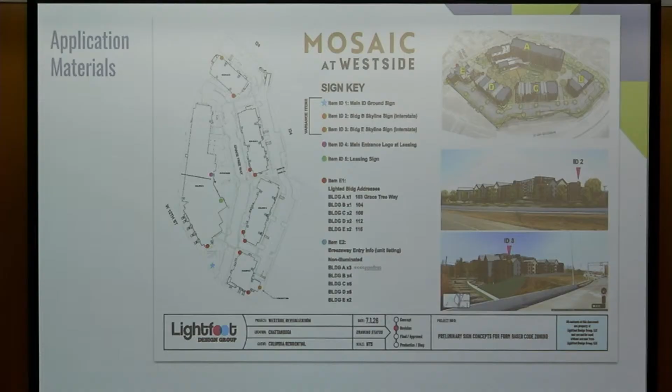This is the monument sign and aerial map of the location. This is the new branding, west side, fully built. Again, this is a list of their modification requests. This is an updated signage key. This is the new branded sign, Mosaic West Side.

And the location didn't change where you're proposing the sign? No, ma'am. Okay, so this is showing the sign with the 5-foot setback. And this is a rendering of the proposed skyline signs on building B, which would face the highway. And then this is a 12th Street perspective, and the larger perspective.

So again, they're requesting those modifications to allow for the monument sign, to reduce the setback, increase the height, and also allow for skyline signs on buildings of 4 or fewer stories. This is in our west side context area, one of the oldest neighborhoods with rich and complex history, now home to both private and public housing. The intent of this zone is to accommodate a mix of medium and high intensity multifamily housing options, mixed with neighborhood commercial uses in a pedestrian environment that remains respectful of the neighborhood's rich history.

So I would love to invite the applicant. Okay, and if you want to go back to this. Can I swear everybody in first? Oh, did I miss that? Yes, I apologize, I just don't want to do it for every single person. Yeah, got it. If you're speaking today, will you please stand to be sworn in?

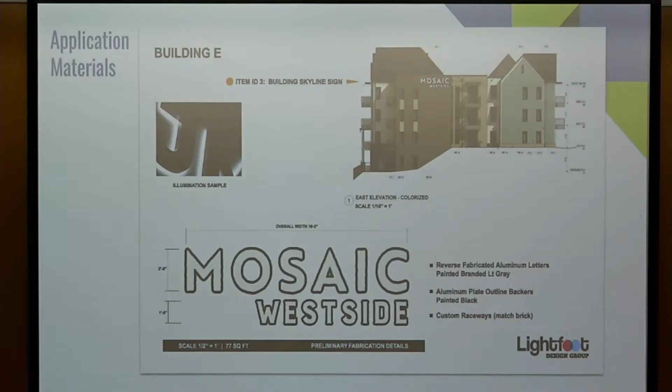My name is Dina Harvison, I'm with Lightfoot Design Group, and I represent Columbia Residential. One of the owners of Columbia Residential is here with me today and wants to contribute to the conversation. When we were here in February, we presented our modification requests, and one of the setbacks was that the final branding and name of the community had yet to be chosen. So we elected to come back once that was completed, which it has been, and was part of the presentation today.

We were also asked to provide a PowerPoint of some pedestals in an urban setting, like what we're asking for. Is the PowerPoint presentation part of the slides? No, I did not get that—but you emailed it to me? Yeah, it was emailed, I emailed it to you. And I think I uploaded it as well, both. It's a PowerPoint presentation. You had wanted to see what some pedestals look like in that urban setting, and that's what the PowerPoint presentation is.

To introduce you guys, I don't know if you're all familiar with the West Side Revitalization Project, but it is primarily diversifying the housing of that area. It represents the east corridor, split by the interstate. The skyline signs we're asking to modify—we feel that's an integral part of the community, mainly because of the interstate visibility.

No, I think it was the PowerPoint I emailed. There's a PowerPoint, Columbia sign. Oh, there it is, yeah, that's okay. Yeah, okay. These are examples from other projects that just show the pedestals.

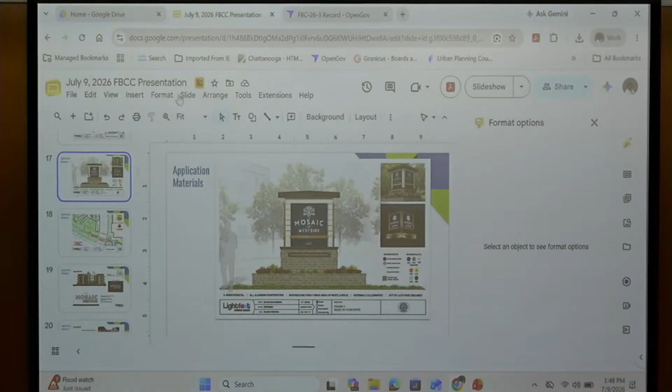And then the final modification request is to install skyline signs on the buildings that front Interstate 24. That's the last 2 pages.

And those would be fabricated aluminum letters that halo illuminate from the back side. So they're very classy. It's more fitting with a residential, higher end look than a commercial site.

That shows you the entrance with the slope and the heights of the buildings, which is why we're asking for the increased height of the sign.

And I also have the owner, Jim Grauley. He is partnering with Chattanooga Housing Authority, and he would like to say a few words too, please.

Thank you, Dina. Thank you for the opportunity to speak to you. I just want to give you a perspective from what we're doing here and also answer any questions you have.

The West Side Development, we were recruited as the master developer in partnership with the Chattanooga Housing Authority. It's really an initiative of the City of Chattanooga, the Housing Authority, and then we've come alongside that as the housing development partner.

And you may know it's a comprehensive effort to really redevelop the whole west side area, which is centered around the College Hill Courts, which is 497 1940s public housing units. So we're replacing every one of those one for one.

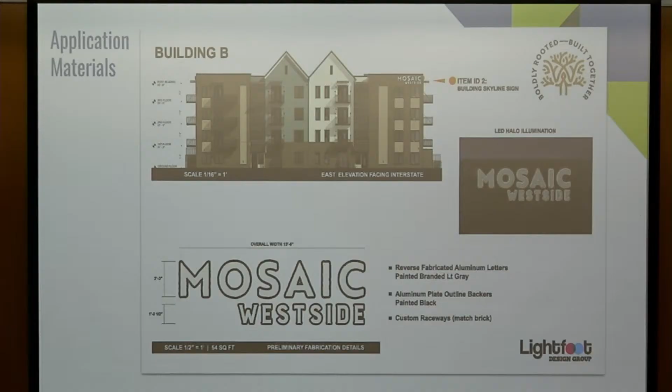At least on the skyline side, what is it that you're asking for? What is not complying - is it size, the location, the height of the building? The way the code reads, is the building tall enough? You're not supposed to have a skyline sign in a building less than 4 stories - or is it 10 stories? The code reads over 4, but Building A is 7 floors. It just so happens the buildings that face the interstate are 4 floors. But the code reads over 4, so that's why we're asking for a modification, to place the signage on the buildings that face the interstate.

Yeah, because it says 4 or fewer. We were trying to interpret that, because we thought 4 would be included, depending on how you read it - where you put the comma and the pause. Okay, but you said you have 4 stories? Yeah, the buildings that face the interstate are 4. But the way that reads, it does include - doesn't it say over 4? Or does it say buildings of 4 or fewer stories? So this is 4 or fewer. Okay, okay, yeah, we thought 4 was okay, but we're making sure. It's not the best wording.

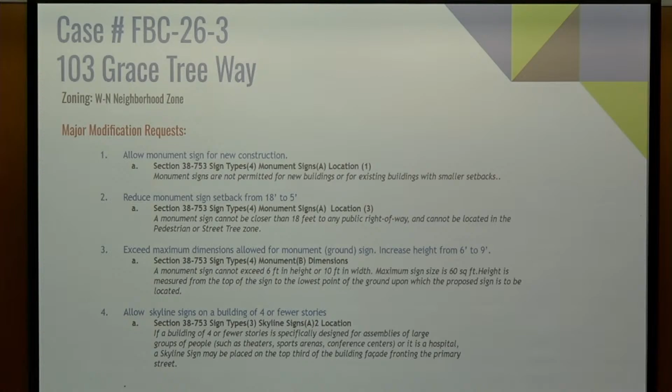Lindsay, did you have a question? I did. When I think about a monument, I think of something that pays homage to our history, to a place. I'm curious - and I think monument sign brought that to mind - is there anything on this site in particular, as the first phase, that does pay homage to the history with the school? Is that something the sign itself could be monumental to, or is it otherwise represented?

I think that's a really good point. I would point to a couple of things. We've had a lot of success with these kinds of signs in these kinds of redevelopments, but that doesn't address the historical element. The two things here that tie into the historical are: one, you'll see a lot of brick and masonry on the buildings, because the public housing is brick, the school is all brick. We were involved in the demolition of it, and it has a lot of history.

The other thing is the tree. Those of you following the master planning process know there's a tree called the Grace Tree that was very much an icon. There were two big icons in the middle of College Hill Courts - one was the Grace Tree, the other was the flagpole. We're actually going to replace the flagpole in a future phase. But the tree got hit by lightning during the master planning process, and ultimately we had to take it down. We've done a lot of things to honor that - we saved the tree wood, and a local fabricator took it down, cured the wood, created planks, and we're making tables out of it. That'll be really beautiful. And we also put it in the logo, because it keeps coming up, and we want to really honor that. So the logo is on this sign here. Those two - the brick and the tree - are the things that would be evoking the history. There's nothing specific to the school, but that was a very important thing in the community.

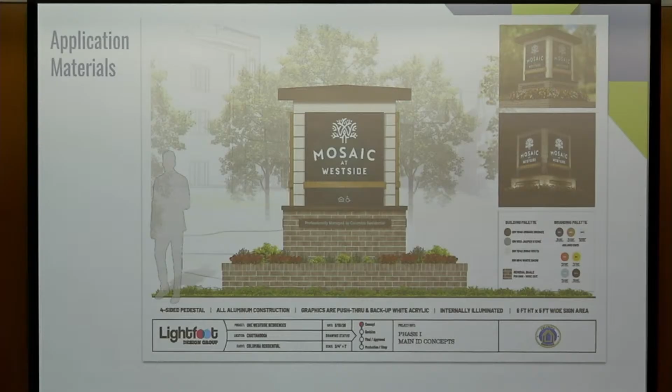Any other comments or questions from the committee, from maybe some folks who are from the February meeting?

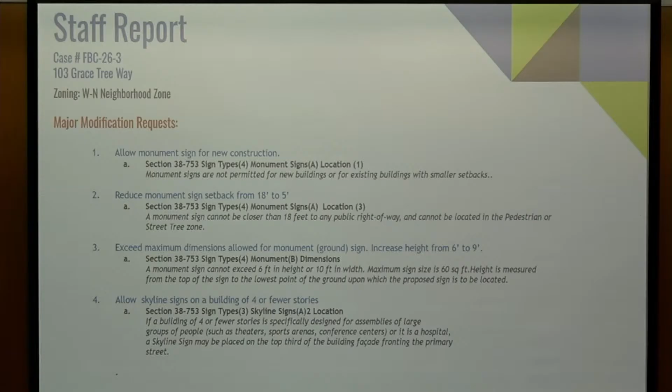I'd make a comment. I'm familiar with the neighborhood and it's a nice development going on there. But what they're talking about on that monument sign, when you come out of that curve with 12th Street, it's going uphill. So there's really the only way you're gonna be able to see what that project name is, because you gotta be paying attention as you come out of that curve and it's covered overhead, under the interstate, and when you come out, the development is immediately on your right. And then it slopes up, so there's really no way of seeing it if that sign is pushed back 18 feet, and you can't drive and look. So I don't have a problem with the signage.

Okay, so you think there's significant enough terrain issues that... Yeah. Okay, that's good. I think there's more than it, in that diagram, the architectural, it really feels like a lot more slope than that. It's pretty steep. You can see it in the photograph from the street, but it feels like, as Mr. Ruff said, more slope than that.

And we also have handicap accessible sidewalks. We have a lot of things going on there. There's equipment related to the fire pumps and things like that. So that is also a reason to locate it where we've asked for, at the 5-foot setback.

But I think, if you look at that drawing, right beyond the edge of the building on the right, it's the highway and you're coming out from under that underpass. So it's like you come by, you see there's a building and then boom, it's right there. And that's your one shot to see what it is. And also this phase one is like the corridor entering the entire revitalization project, so it's almost like that's the bookend.

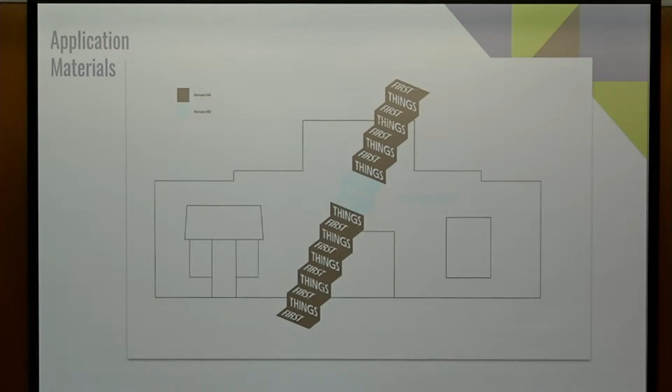So the new logo is just, what's it like? The new logo itself is read, first things first. It's the steps - that's the concept of the logo.

Again, this is my opinion, and obviously there's not necessarily a hardship because you can see the sign from the street. I think smaller would be better. I think the 'for the family' piece is probably too much, way too much, that big, that high on the building. Maybe more pedestrian oriented.

Anyway, this is my opinion. We're beyond the square footage of the sign requirement by a good amount, and that's what we need to focus on, whether or not that's necessary. But if you just look at the white, I bet that's within the 48 square feet.

So if we were to take the white and potentially move it up toward here, and kept 'for the family' underneath, is that something you think would be more appeasing? I believe so.

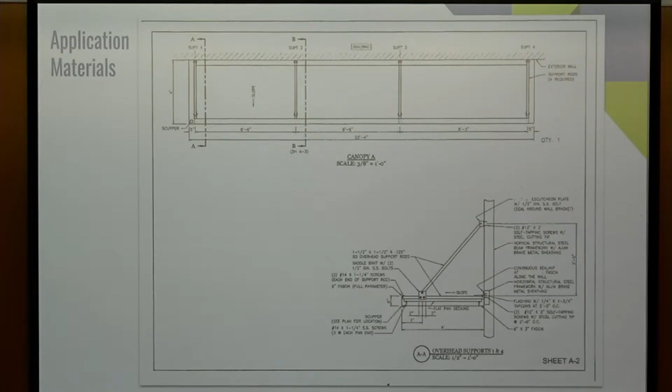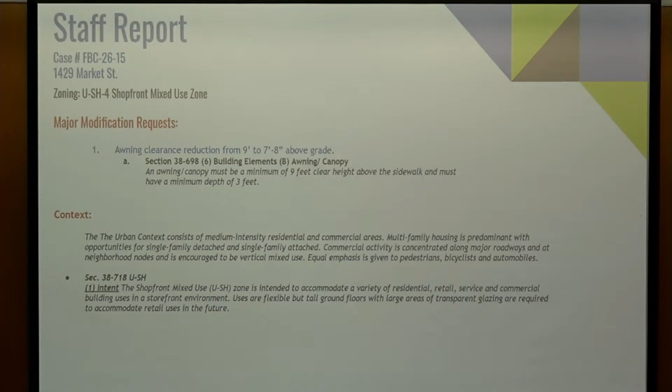I'd love to ask the applicant to come forward.

I'm Jerry Price of Spot Design Studio, 5001 Beulah Avenue. So we encountered some structural issues when we were redoing this adaptive reuse project. It's a complete interior gut, and in the rear, we were going to salvage all the original masonry.

The building was deflecting seriously, with debris in the back. It started to fall when we did demolition, so we had an emergency demolition permit and did a redesign in the rear. We then had the same problem in the front, so we were going to do the storefront infill with just one structural member, and we needed two. We also had deflection - there is a precast masonry beam above the storefront, so we had deflection in that also.

So what we want to do is hang the awning off of the center structural member. Also, when this came up, CDOT required us to get some temporary use, and this is IBC compliant - building code compliant height. It is not form-based code compliant. We could raise the awning to be in the middle of the glazing, which would not look good. It's supposed to appear as a floating, very low profile awning with backlit, very simple address over it. There's not going to be any logo on it.

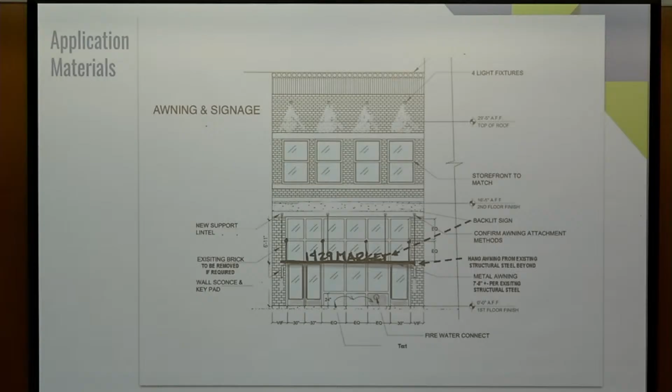That's it. Does anyone in the audience want to speak for or against this project? Seeing none, we'll take it to committee comments. Any questions? Thoughts, anecdotes, poems?

So where the height of the canopy is, there is a steel member behind that - absolutely, directly behind, connected at several intervals along that storefront. Yes, it's a continuous beam. If you go to the shop drawings, you can see where we're drilling directly into the structural member. There is a storefront member, but it's just storefront, not structural. We could go up above, but then we would have to drill into the storefront. With the deflection and wind load, we prefer not to do that. It's done elsewhere, but definitely not preferred.

And if we go any higher, what's the point of it? One of the points is there's an office entry there, and also 3 dwellings. It's for rain - well, it's also aesthetics, but also for entering a building in weather. The higher an awning gets, and when it's a shallow awning, it doesn't really serve its purpose. It is conducive to other awnings directly around us - there's plenty, we measured about 12 of them. A lot, and I don't know how they're there, but they don't look bad. There's a lot that are 8 feet, 7, 9. We are at about 7, 8.

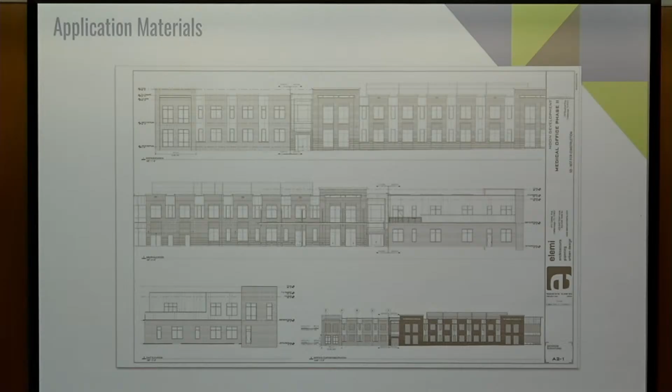For the second phase for the lot frontage - if this were presented as one continuous building frontage today, thinking about the future pedestrian experience along that urbanized riverfront parkway, is there anything that would comply with the form-based code as presented as a continuous building, as it will be experienced once it's the addition?

I believe so. I mean, this is in a form-based code area, but the actual context - what is to the lot to the right in this picture? A large parking lot. Showing the intent of the 90% is to fill missing teeth in the urban fabric, so... right.

You gotta think that the rest of this land is still developable to fill that gap if it's ever needed. If you get to the 90%, you still have room for the parking. I wouldn't have - technically I would be able to meet the minimum parking requirements, but the function of the facility would be awful.

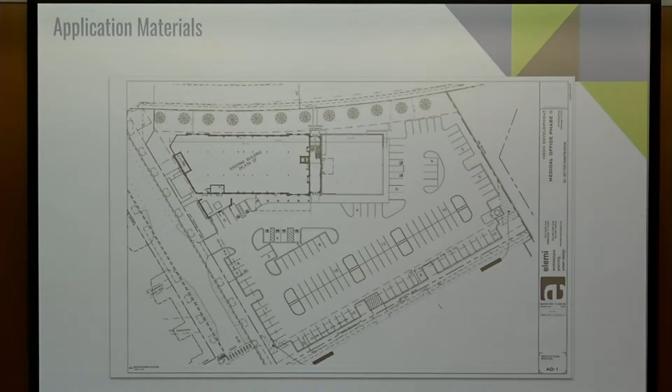Anybody like to make a motion? I'll make a motion to approve. Make a motion on case FBC 2616-1247 Riverfront Parkway as submitted, pursuant to the Chattanooga City Code Section 38596, and pursuant to the form-based code as specified below and subject to any and all conditions, none stated, to approve decreasing the minimum A street lot frontage from 90% minimum to 70%.

Okay, can I get a second? Second. All right, all those approved? All those opposed? Good. Thanks, guys.

Last case today is FBC 26-17. It's located at 609 East 11th Street. This is in the I-MX industrial mixed use zone, and this is an existing building, so it was not conforming to form-based code when we adopted the code - it's a legal non-conforming building, and they are going to do a change of use, which triggered the code compliance.

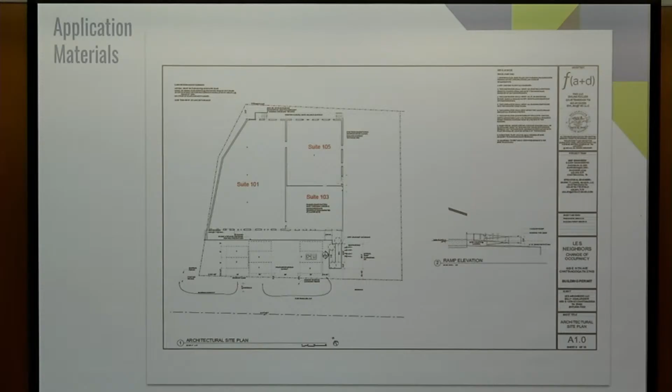This is some of the elevations. Some of the work they're doing on the exterior is replacing 2 doors in the garage door. The applicant can explain a bit more what they're doing, and they're going to improve the parking for ADA compliance. This building doesn't meet code standards, so they're seeking modifications for the fenestration and the building setback placements.

I'd love to ask the applicant to come up and talk about the property. All right, Dylan Fuller, 1805 West 38th Street.

Can you steer me to the one with the 2 red rectangles on it? Yes, thank you. I think the main facade in question is the front facade. This is the bottom one, the street facing facade. There's the 2 opaque garage doors. Technically we're adding some transparency, which I think was part of the trigger for this. We'd be taking out those opaque garage doors and replacing them with a clear door and other windows that match the sill height. They aren't fully to the ground. Otherwise, no changes to the exterior of the building minus the ramp at the parking lot.

And then along the east side, which doesn't face the street, I don't know if there's anything we need to talk about there. Yeah, and we don't plan to move the building, so, yeah.

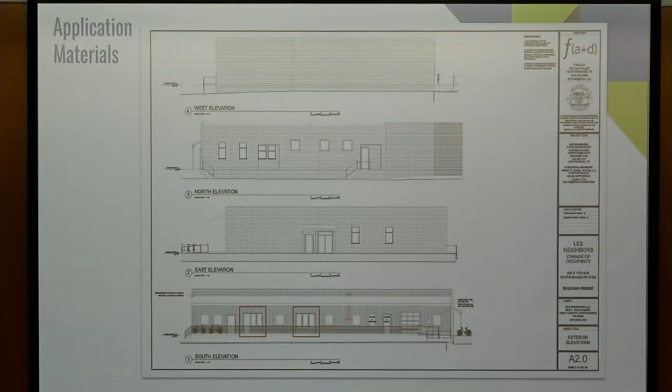Any other thoughts? Would like to make a motion? Yeah, I'm gonna make a motion to approve. Need to read on this. Make a motion on case FBC 2617, 609 E 11th Street, as submitted pursuant to Chattanooga City Code, Section 38-596-4, and pursuant the form-based code as specified below and subject to any and all conditions.

Requesting a decrease from the minimum ground story fenestration from required minimum 50% to existing. I approve. I will second. Can you do the second one too? There's two. The second request to increase the primary street maximum setback from 15 to existing.

Okay, we have a motion to approve both modifications. Can I get a second? Second. All those in favor? Aye. Any opposed? Motion carries. Thank you for your patience.

It's a long one today. Thank you.

Still make it easy for it. I think I got how much? Thank you. Got 6 minutes left on parking. Well, if you park down here, you know, you don't have to pay for it. But you park on the street. All right. Last time I had no time left, and last time I was late. It was full. Good to know.